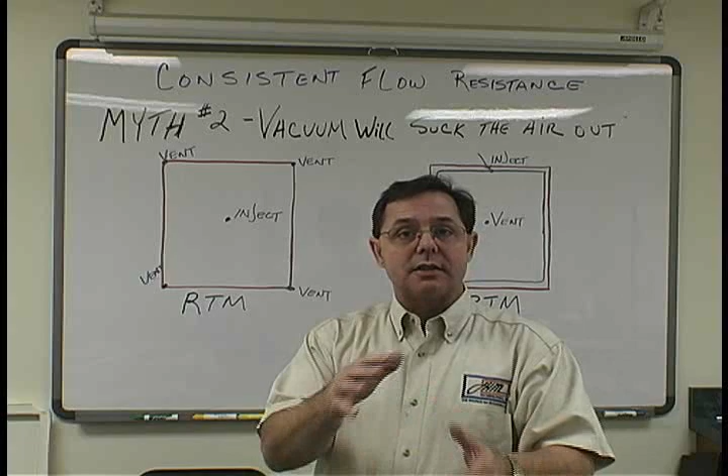However, if we hook a pump to the interior of that box, a pump that can pull atmosphere or pump out air, it's going to pump the air out of that box. Now we say we have a vacuum in that box. So what we've effectively done is pump out some of the atmosphere. Now what's outside the box is trying to get inside and equalize the pressures, so we've created a differential—the differential of the outside pressure in comparison to the pressure inside.

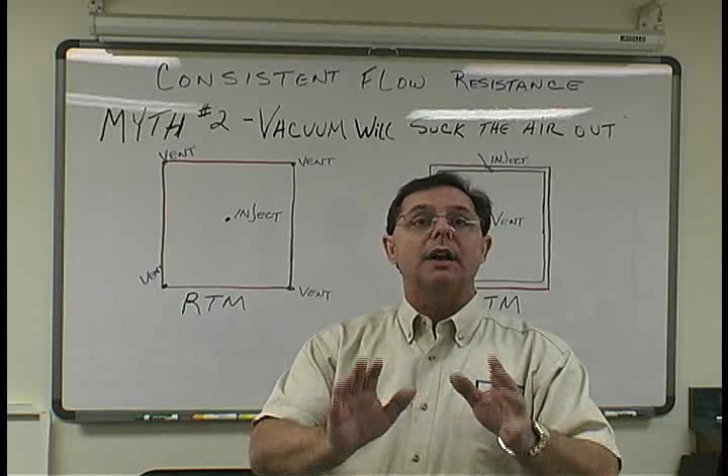Now we use the illustration of a box, but really what we're talking about is a mold. So in our molding operations, when we hook a vacuum line to the mold, we're in effect pumping the atmosphere out to a given value. Normally in the Light RTM process, we pump out about half of the atmosphere. Well then obviously we've left half of the atmosphere inside the mold. That means we still have to influence half the amount of atmosphere that was in that mold to start with. We've got to instruct it, push it, do whatever we need to communicate to it to leave at the exit vent. Now how does that happen?

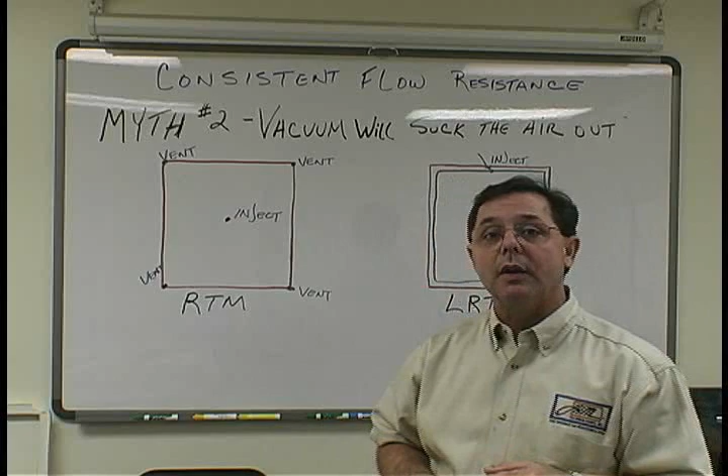Again, the myth in the industry is, well, I've hooked vacuum to it, so it's like a Hoover vacuum cleaner, it's sucking the air bubbles out. That's not how it works at all. So what we're going to do is talk about just how it works to have the atmosphere leave the mold.

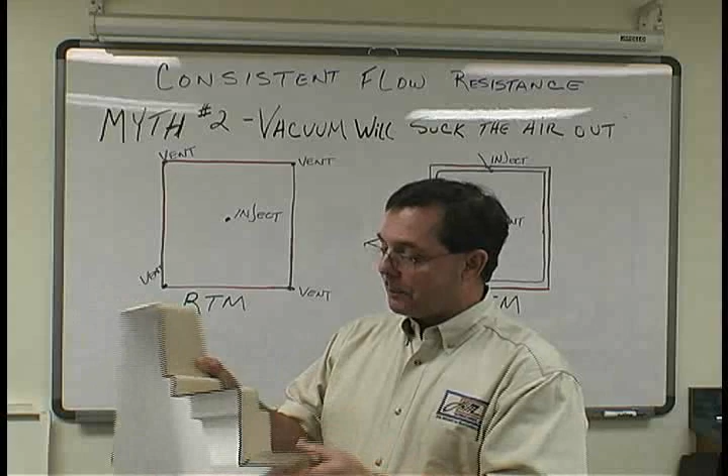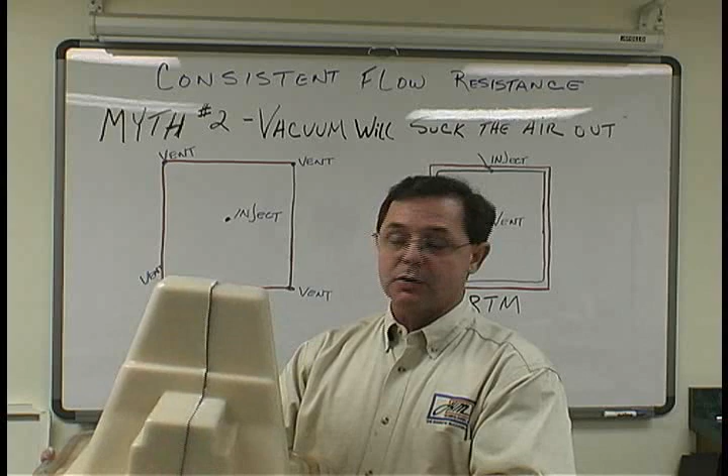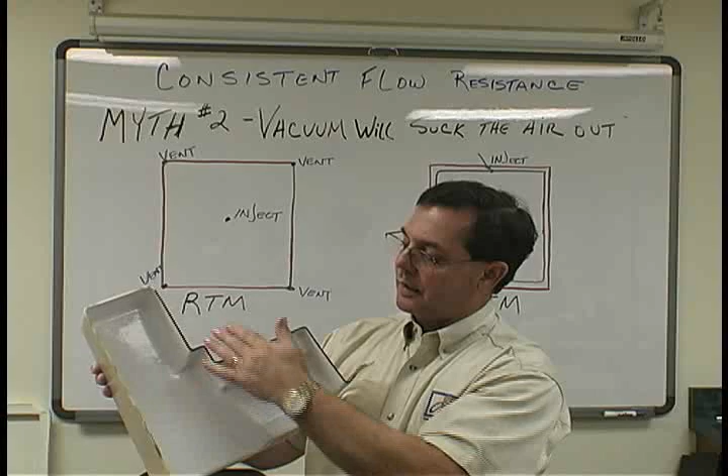Now, first thing that's critical, and what we teach in the class, is how to create an accurate tool. I took apart here—this is a tub for a medical cell-saving device. In fact, one of our other videos online shows the Aviator, our semi-automatic machine, making it so simple and easy to inject this part, and you can watch that video another time. But when we were done making the part, we took it off, and just moments ago I highlighted this section of it just to show you how consistent the laminate thickness is.

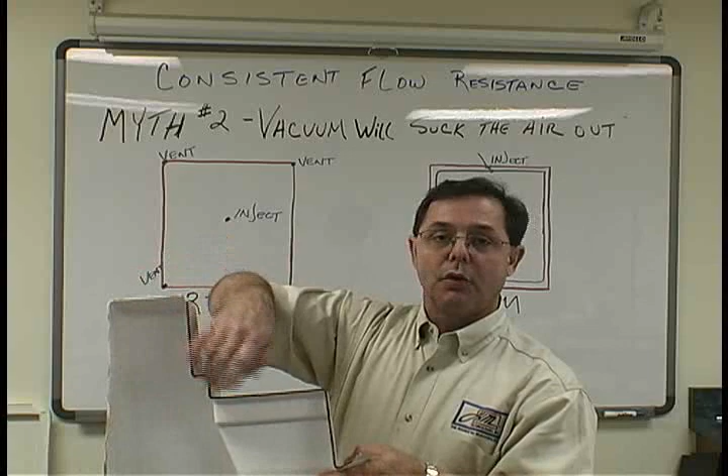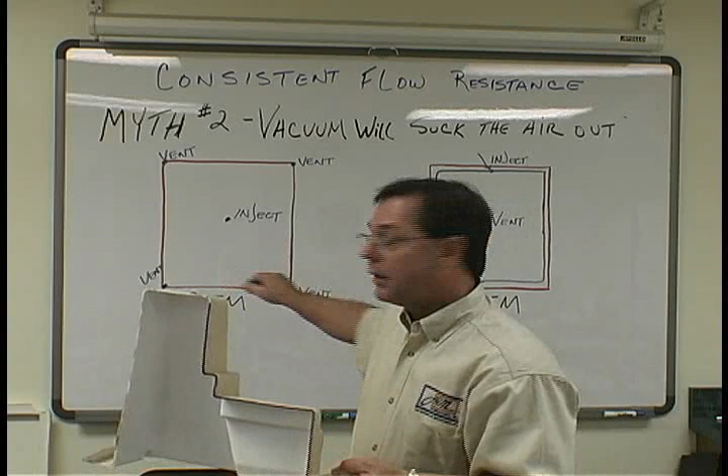Now, we teach you how to make tools that accurate. You'll find many times in the industry tool variances in cavity thickness are the norm, and they shouldn't be, because part of the critical features needed in the process, be it conventional RTM or RTM Light—which is a more recent innovation in the industry—it's still based on having tools that were built accurately.

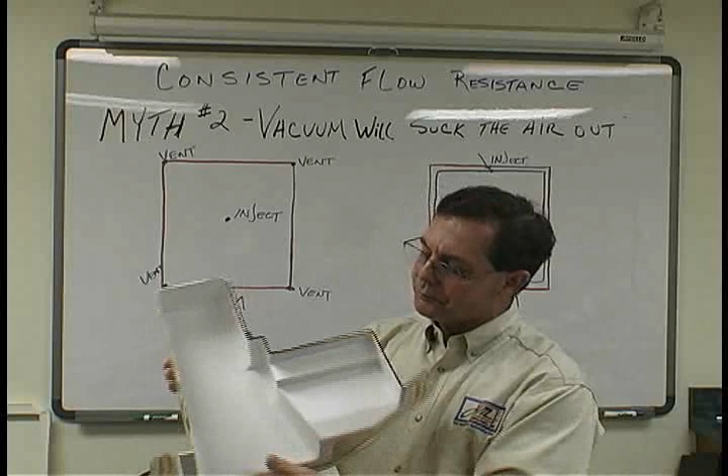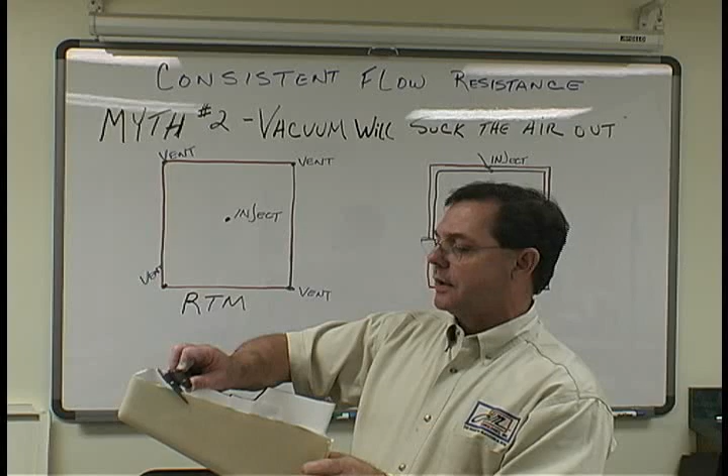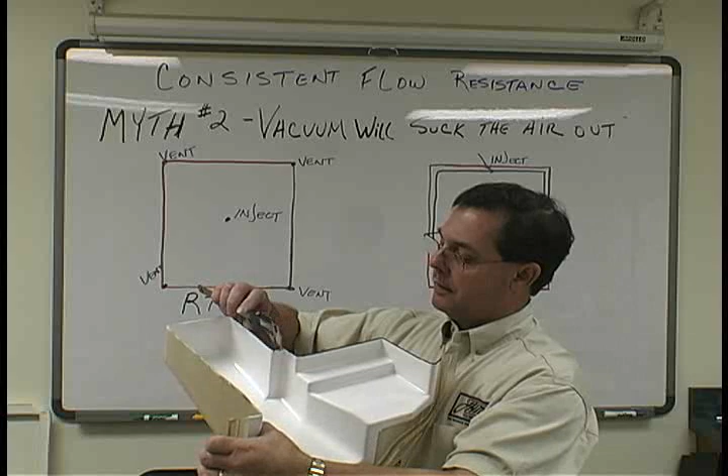So that's critical—just what we consider accurate. Well, there is always some tolerance involved. Now this mold was sheet waxed to 120 thousandths. So I'm measuring right there at 117. I'm getting 124. Right there, I'm at 124 again. I'm at 130 right there.

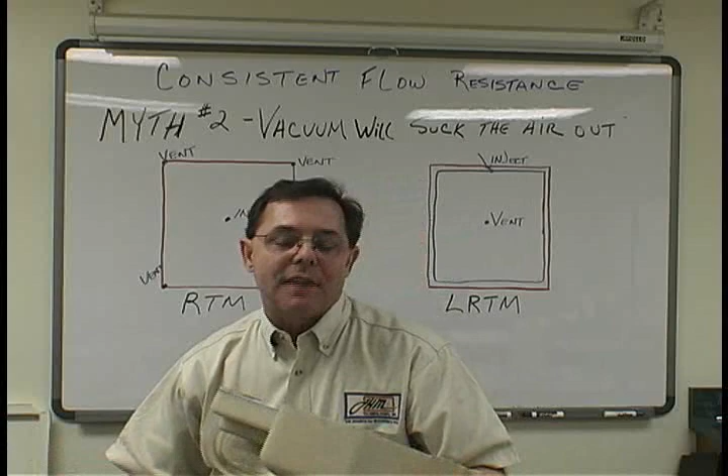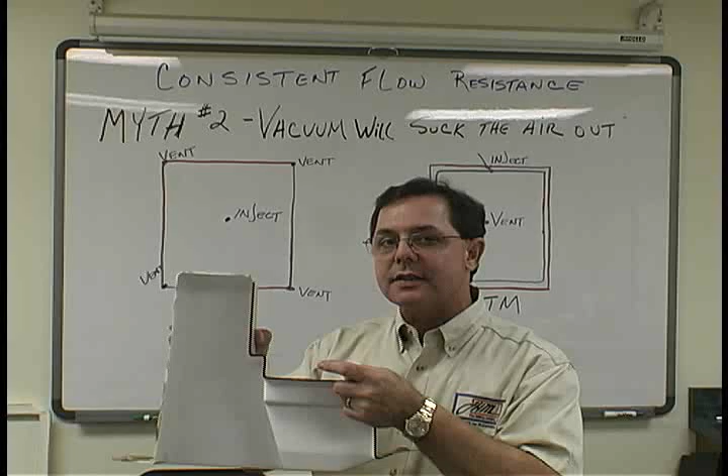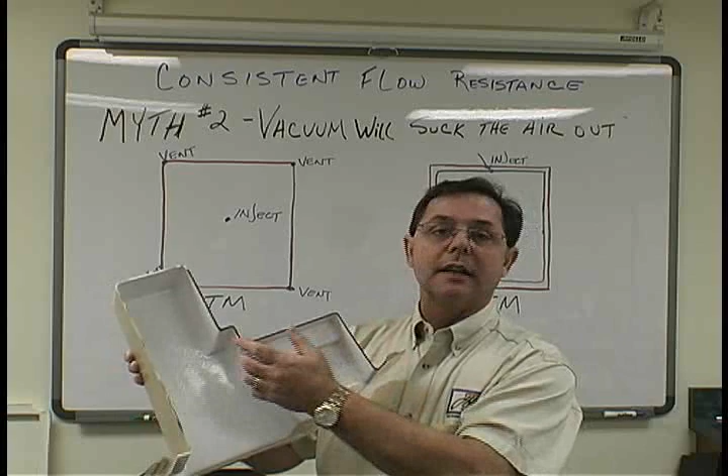So you see, we're within 10, 12 thousandths of target, which for this particular application was plenty accurate enough. With a bit more precision on our process controls of vacuum and pressure, again this was injected - you'll see in that video, under the first time injection, it's mentioned that is the first part that came off that mold. We could get that down a couple 3 thousandths variance. The point is the tool was built accurately.

Key number 1. Key number 2 is to understand then what influences the air to leave. Well, let's talk about our 2 different types of processes for a minute.

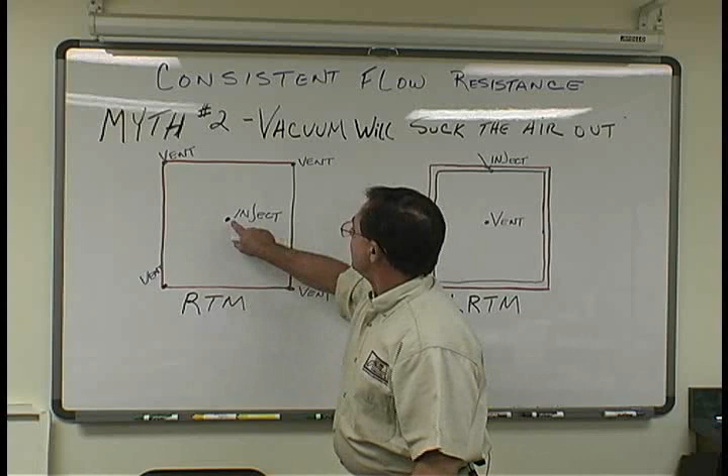When we look at a mold here, let's just talk about a flat shape. It doesn't make any difference if we could add geometry, we'll get into that in a moment. But let's say RTM, what everyone considered the original process, resin transfer molding. In that case, we would normally inject in the center of the part, and these would represent the outer perimeter. So what we would do is inject in the center, and exit at the 4 outer perimeter corners. Very typical.

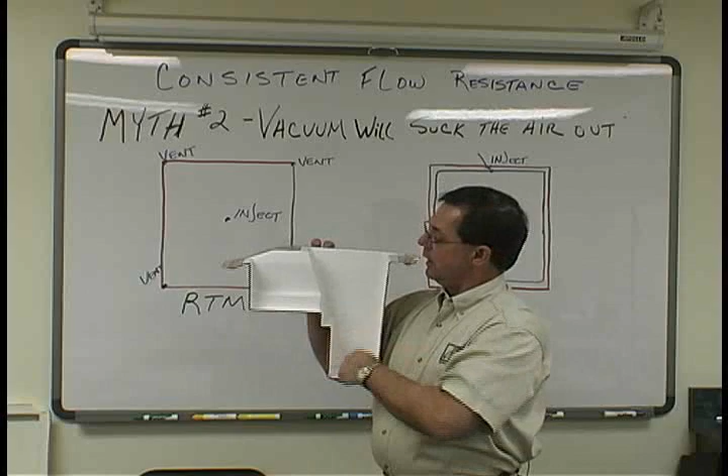Someone said, John, we've got this box, where are we going to inject? I'd say, well, we inject in the very center. In this case, we would have injected straight down here, and put a vent here, here, and in the other 2 corners, the other half of the box. Would have been very standard, would have gone on about our business and never thought twice.

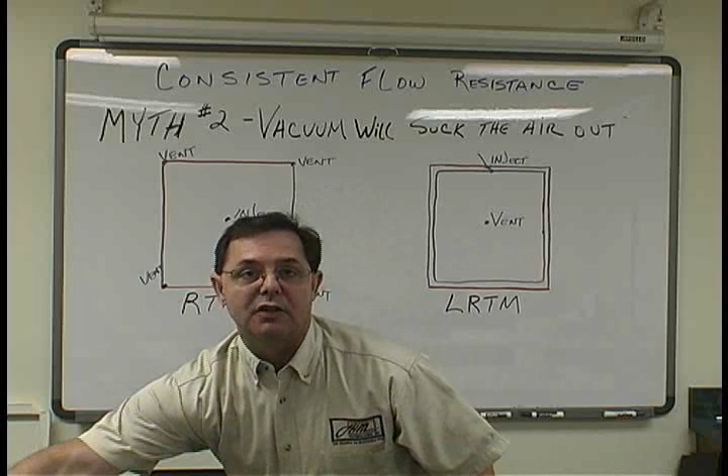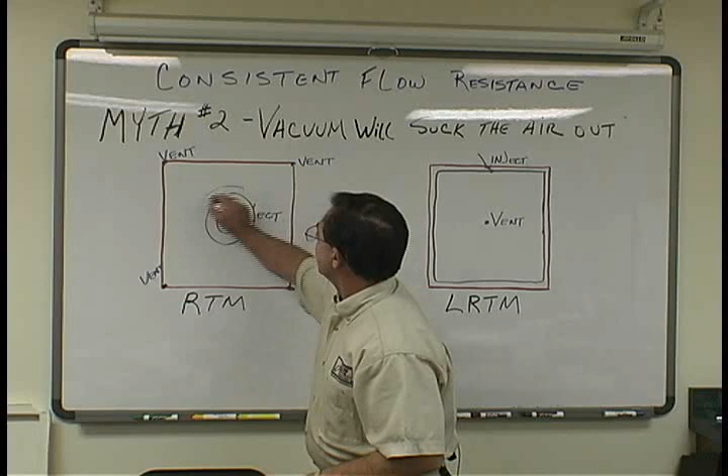And we did it that way for 20-some years until RTM Light came out. But think about what's going on here. We inject in the center, the resin then flows outward in typical ring fashion, filling. But the point is, it's diverging away from the injection point. RTM Light, what's the difference there?

Basically, it's the same mold, lighter structure because it doesn't need to hold back as much pressure. We've drawn atmosphere out by pumping some atmosphere out with a vacuum pump, which we talked about.

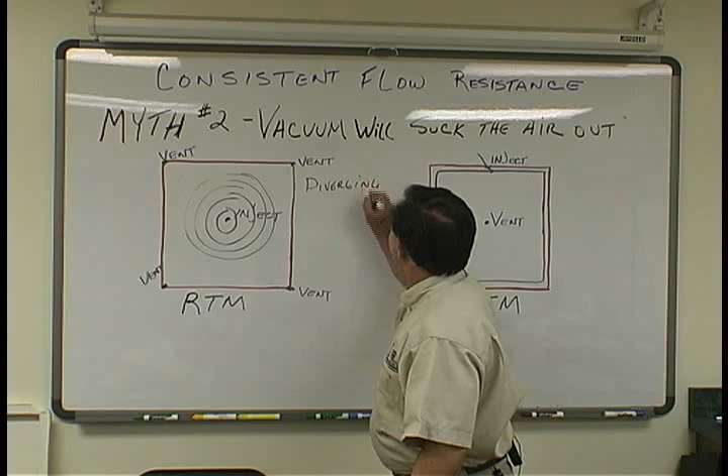Now, in that case, we don't inject in the center. And this that I'm about to tell you is the fundamental difference between RTM, which was a diverging flow path from the point of injection diverging away. The biggest difference between the 2 processes is the RTM Light process is a converging flow path. What does that mean?

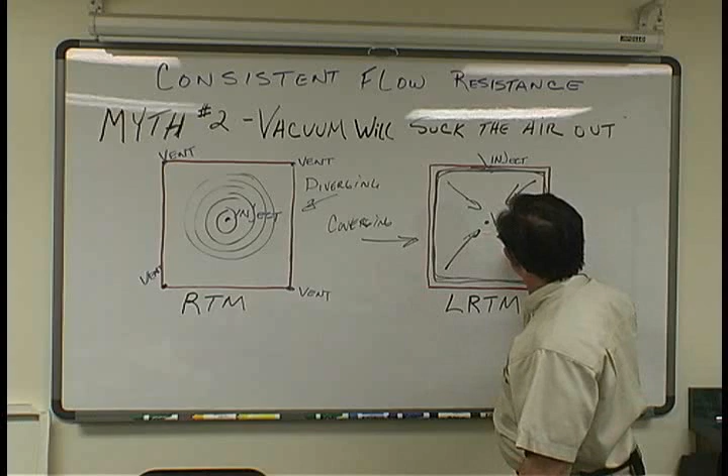It means that we inject around the perimeter of the fiber pack, around the outer edge of the mold. Where here we vented at the outer edges of the mold, RTM Light, we inject around the edges of the mold. Subtle in sense, huge in performance. Let me show you: we now inject around the perimeter, so we have the largest area, all focused heading towards the center of the mold. What this is doing is we've got the largest area continuing from the fill towards the center, all focused on getting to that center point.

I'll illustrate it this way. Take a crowd of people, walk into a room, and we're all trying to get to the very center. Well, what's going to happen? We're all crowding in - the ones in the leading edge are getting elbow to elbow. They're getting tighter and tighter, looking around saying, hey - but they're fighting to get through the glass, is what's happening with the resin and the mold. Ourselves, we're just trying to get through here without crunching each other. Ones in the back are saying, come on, let's move, let's move.

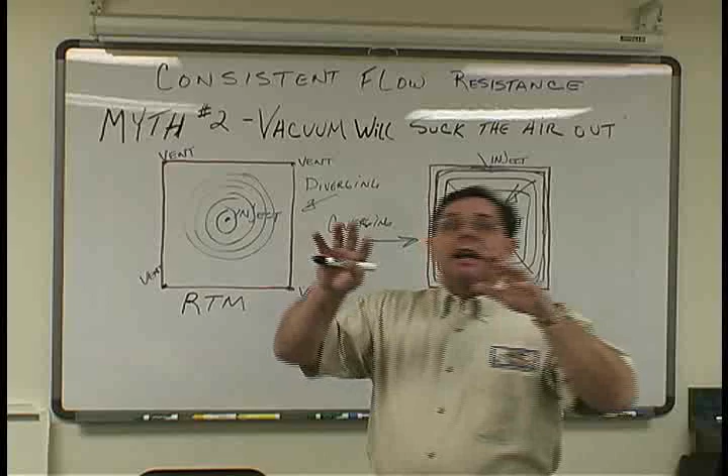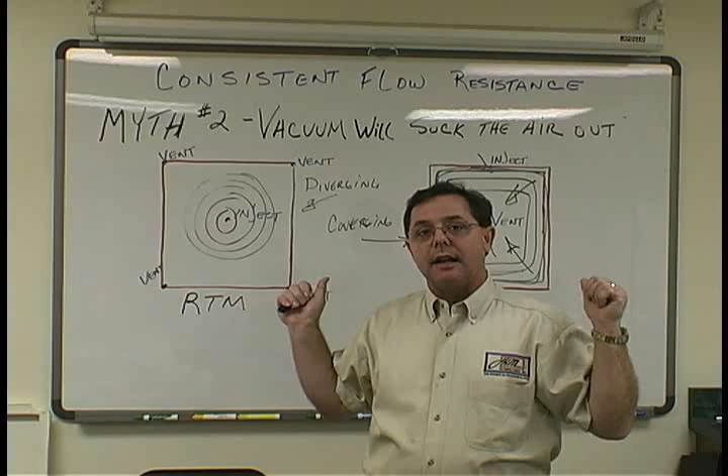We're all saying, look, we're getting there as fast as we can. So the ones in the back start looking around, they say, well, where else can I go? They see a little spot over there, they go over there. Well, think about the resin doing the same thing. The resin's flowing through the mold - the leading front edge is jammed up because it's trying to get through the glass. The resin in the back's trying to go, it can't go forward fast enough. So in a converging path, the front leading edge becomes a restrictor, forcing the global area of wet resin behind to look for a void. Very critical - that is what would allow, let's say for whatever reason, we had a dry spot here, resin flowing right around.